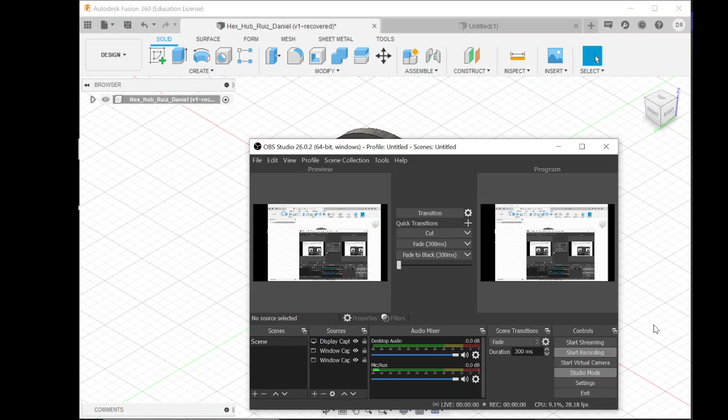Hey everyone, so today we're going to be doing the Hex Hub tutorial.

To give you a little bit of information before we start, the Hex Hub is used to mount and hold the hex shaft. The hex shaft can be used as an axle for wheels, but last year we used that hex shaft as an axle for the collector.

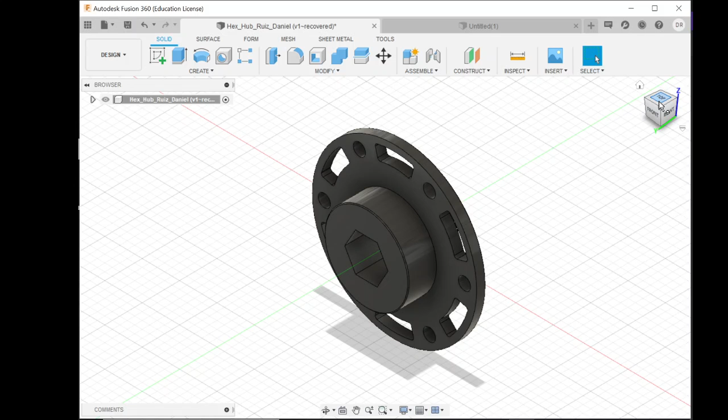So let's go to the front view so we can talk about some of the features. We have 6 holes that surround the design, and you also have 6 rectangularly curved spacings, and you also have a distinct hexagonal shape in the middle.

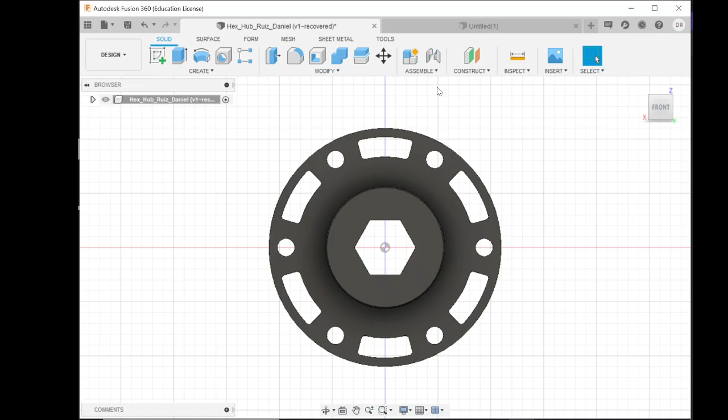So now that you're a little bit familiar with this, let's begin. You want to first begin by creating a sketch. It doesn't matter which plane, but I prefer the ZX plane. So right here, want to create a line.

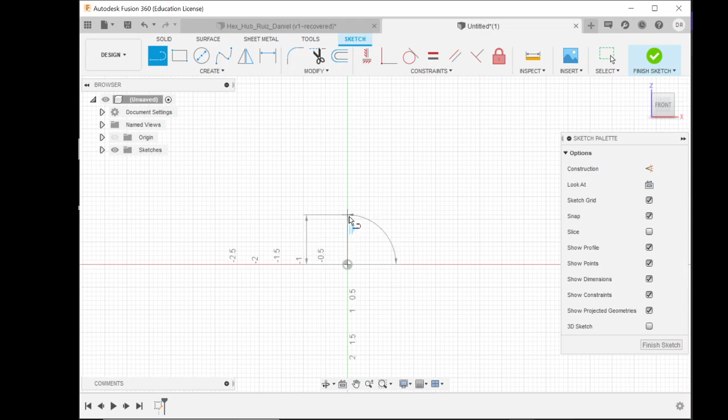You start from the origin, and on a 90-degree angle, you want the measure to be 1.1 inches. Once you have that, right click, and on the top, you want a measurement of 0.5 inches.

Going to the right, then going down, you want a measurement of 0.563 inches. Going to the left, you want a measurement of 0.375 inches.

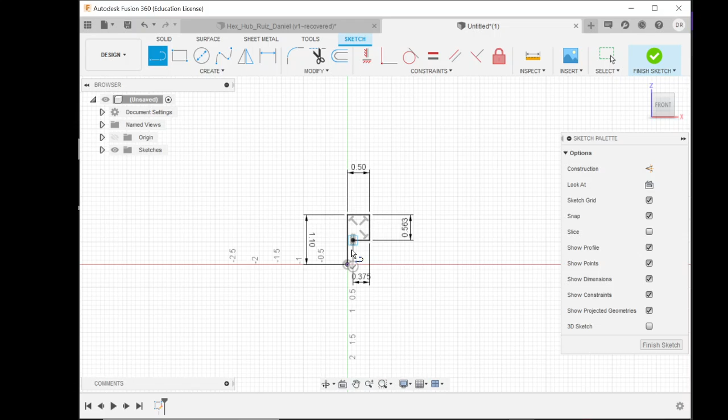Inches. Right click. Let me zoom in so everyone can see. And on the baseline, make sure that measurement is 0.537 inches. And then going to the left is 0.125 inches.

Once you have that, you can finish your sketch. And then in between the extrude and hole tool, there should be a revolve tool. You want to click there. Your profile is already pre-selected, so you don't have to worry about that.

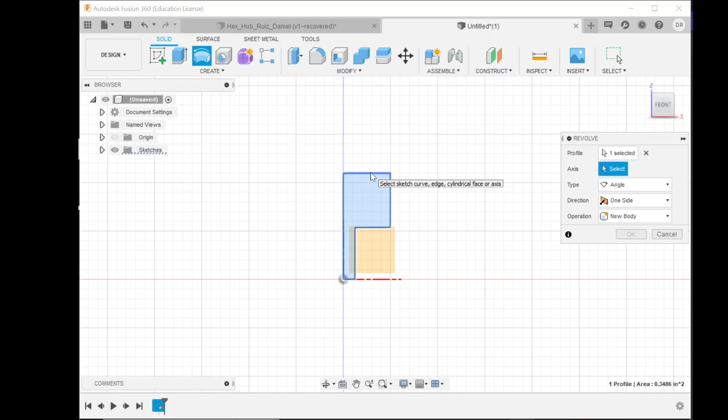All you have to do is click the axis. The axis we want this profile to revolve around is the bottom line of the profile. Click that, click OK. So now you have the overall shape of the hex hub.

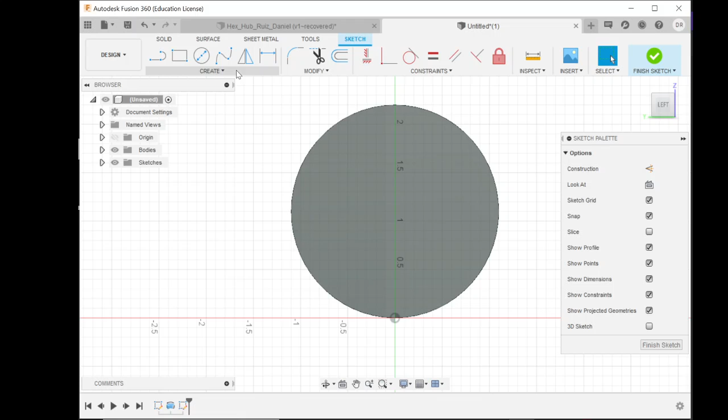Okay, so now let's create a new sketch on the back. Okay, so let's move this. Want to go to the create drop-down menu and click Polygon. It should be circumscribe polygon.

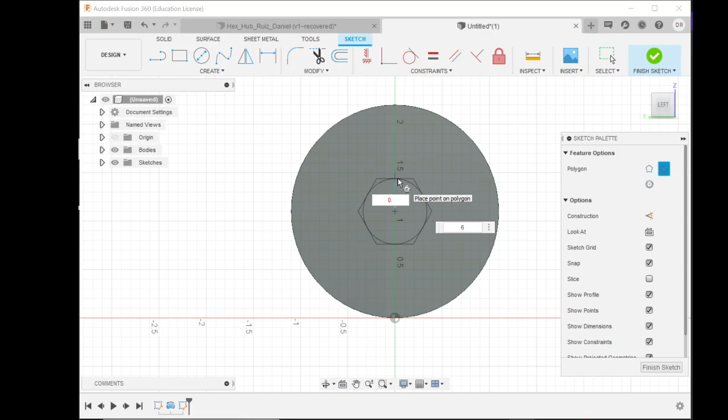And now that you picked that, you want to look for the light blue circle that indicates the middle of this design. So once you do that, you want to guide yourself up. Okay, so once you've guided yourself up, you want this hexagon to measure 0.25 inches.

You have that. Then dimension this because this is not fully locked. So go on this bottom line and then go to the origin. This will fully lock it in, indicated by the extremely dark black.

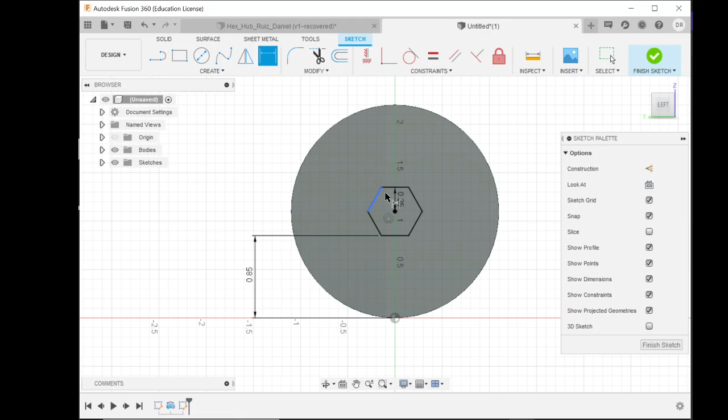Okay, and now that you have that, you want to finish sketch, and we're going to extrude this hexagon. Alright, so let's take a look. It should be an extrusion of minus 0.5 inches, or it's more of a cut than an extrusion.

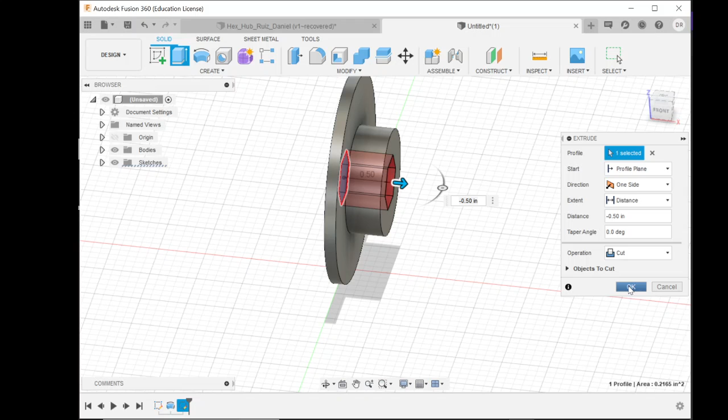Press OK, and we're going to go to back again. So now that we're done, I want to create a new sketch on the back, and then we'll click the center diameter circle right here.

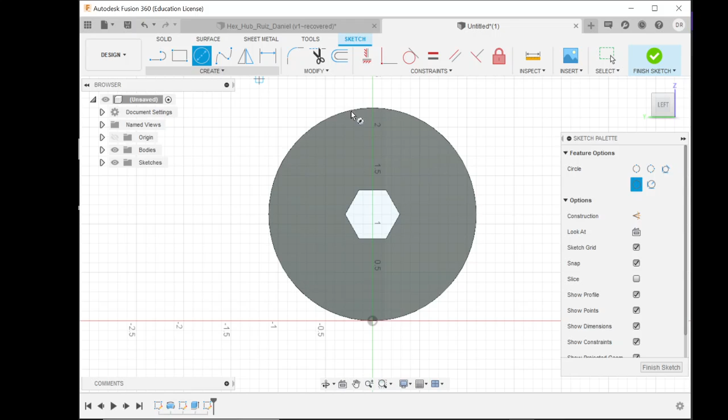And then we'll go to construction. Okay, look for the light blue circle, and then we want this circle to have a diameter of 1.875 inches.

And then press S to look for a point. This point will be used, extremely important later. And then using the dimensioning tool, we will dimension here from the center point to here.

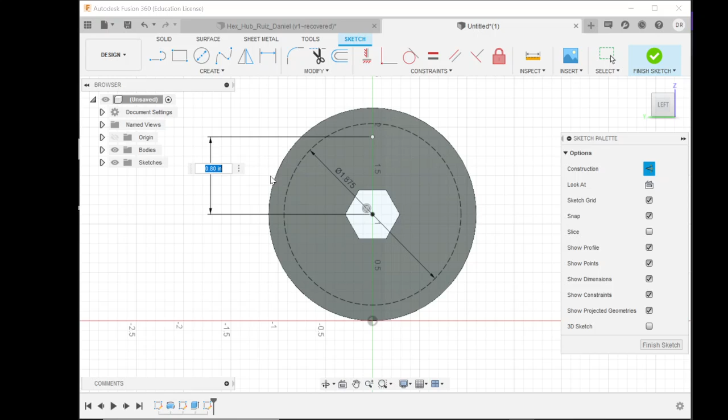We want this to be 1.875 inches divided by 2. This is the radius, so you can see that it will perfectly align with that circle. So once you've done that, as a shortcut, press H, and then click this point.

This point, or this hole, should have a diameter of 0.164 inches. It doesn't matter. This doesn't really matter. I guess I could have 0.2.

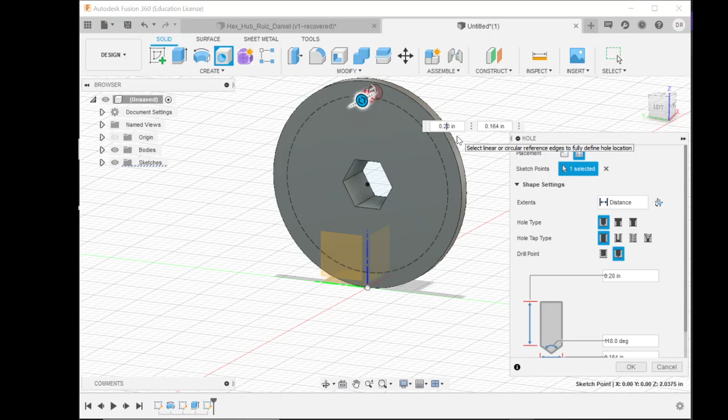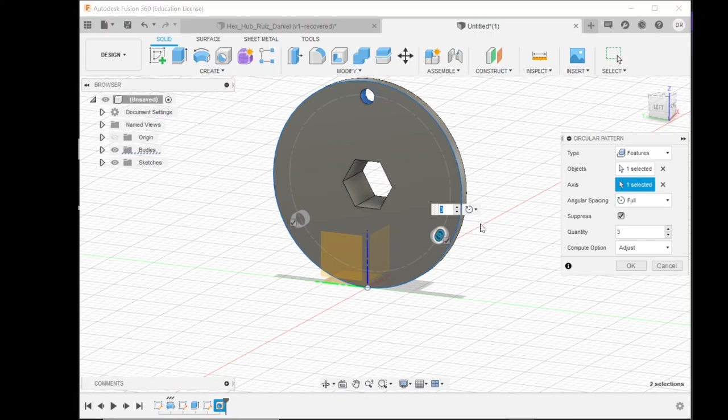Okay, so now once you have that hole, we're gonna look for a pattern. So click S and then type in circular pattern. And then click, make sure your type is feature. So once you click that, we want to select the axis. The axis is the surrounding circle. And then we want the quantity to be 6. So once we have that, now we have our hexagon and our 6 circles.

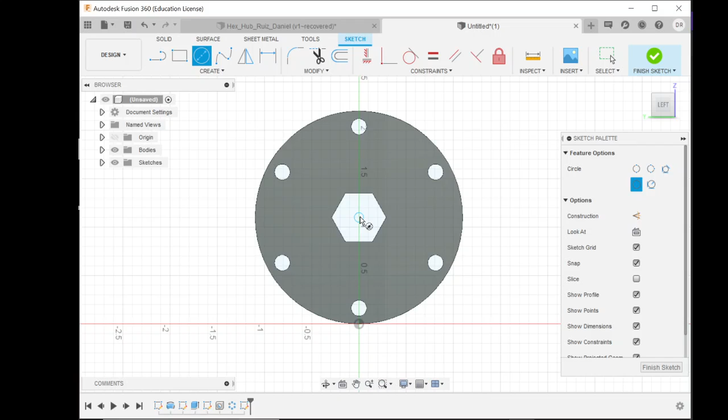So now we're gonna have to get our curved rectangles. So create a new sketch. Okay, and then we're gonna use the circle tool. So you want the first circle to have a diameter of 2.039 inches. Then you want this second circle to have a diameter of 1.711 inches. Let me just dimension it. It's going to be over dimensioned, but it's as a reference to everyone.

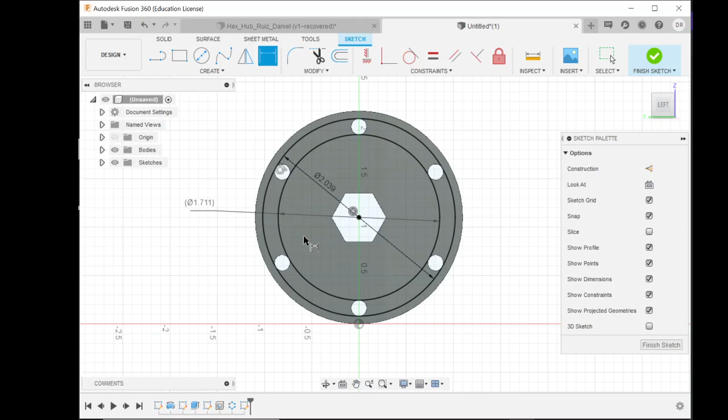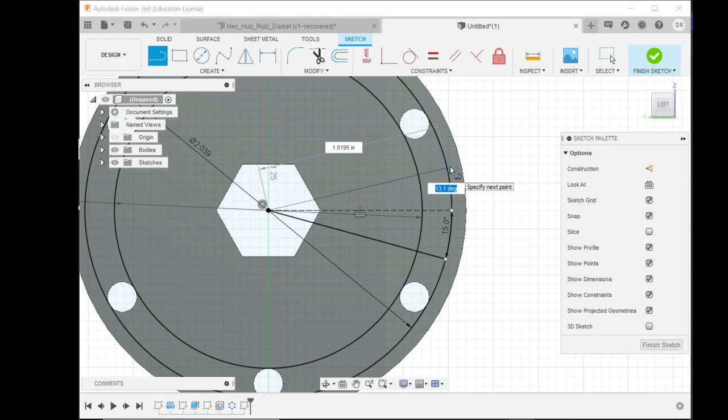Then you want this line tool, and you want to drag it out horizontally. Just make sure it says 0 degrees. Make sure you're on the circle. Okay, so we want this first measurement to be 15 degrees once you're on the circle. So once you're at 15 degrees, click enter. And then another line going diagonally. Press tab, we want this other degree to be 15. In all, this will make a 30 degree angle.

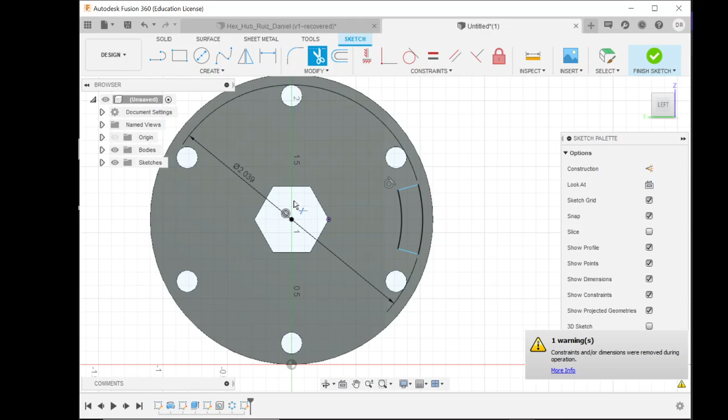Then once you do that, you want to go in between fillet and offset, and there's a trim. So all you have to do is trim everything that is not what we created. So just trim. Okay, and then you're gonna wanna delete this dimensioning because it's now useless to us. And then you are gonna want to fix everything.

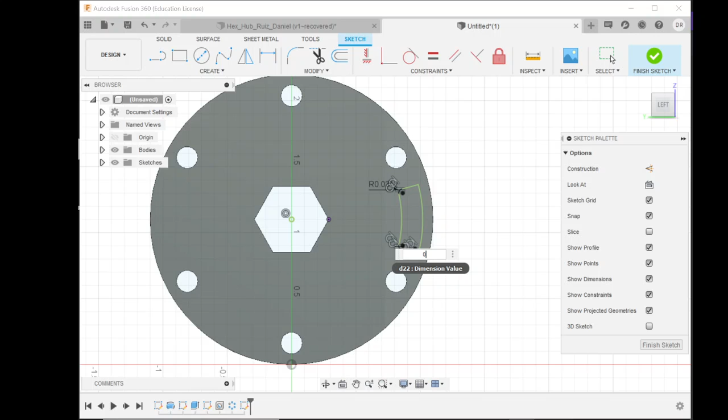Just click or highlight. Okay, once you do that, we're gonna click the fillet, and this fillet should measure 0.0312. The same one too, and just keep clicking the sides, and now you have the basic shape of this. So we're gonna extrude. Okay. Nope. We're gonna have to go back to sketch and fillet this one. Sorry about that. Alright, I'm sorry, my fault. Same thing with this one too.

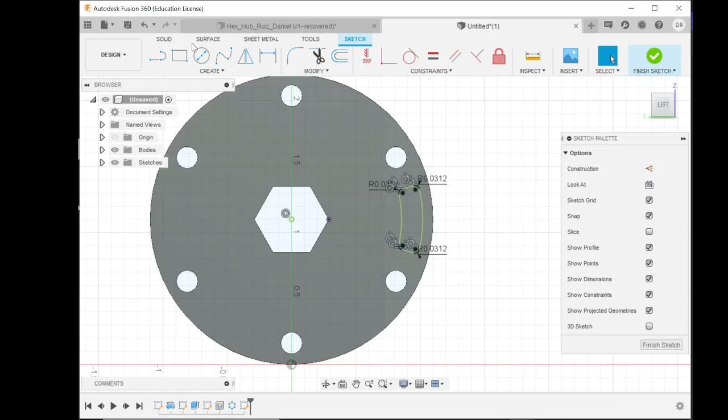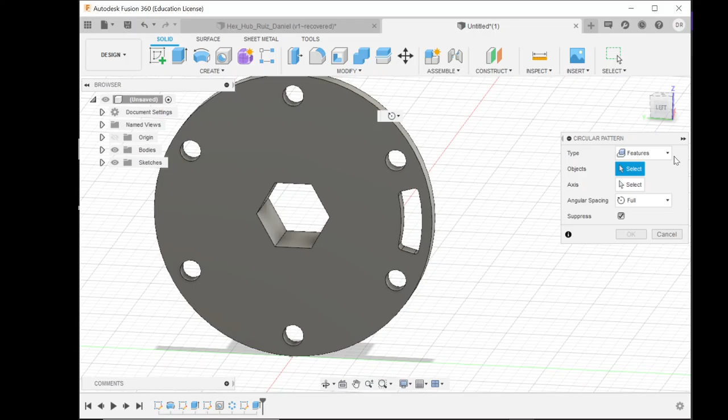So now once you're done with that, you want to go to solids and extrude all of this. Okay. So once you're done with that, we're gonna use the circular pattern. So press S and look for circular pattern. Go to feature. It should already be pre-selected. And then select your axis. It should be a quantity of 6. And then boom. Now you have your spacings and your circles and your hexagonal shape.

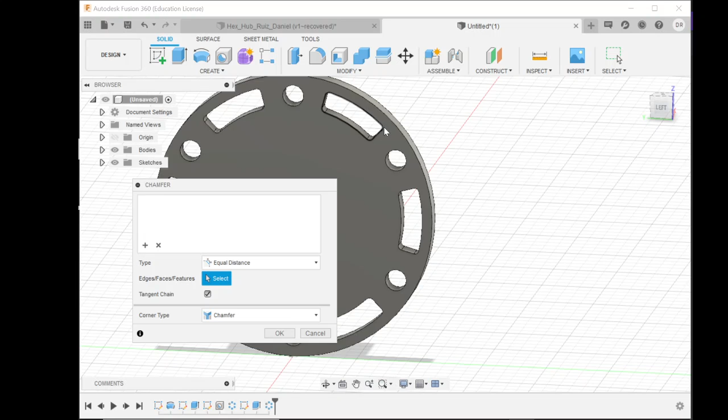For our final steps, we're going to use the chamfer tool. So we want to go to modify and then go to chamfer. You want to click here. You also want to click here. Both of these should have a chamfer of 0.01. And click enter. And now we're going to also modify the appearance.

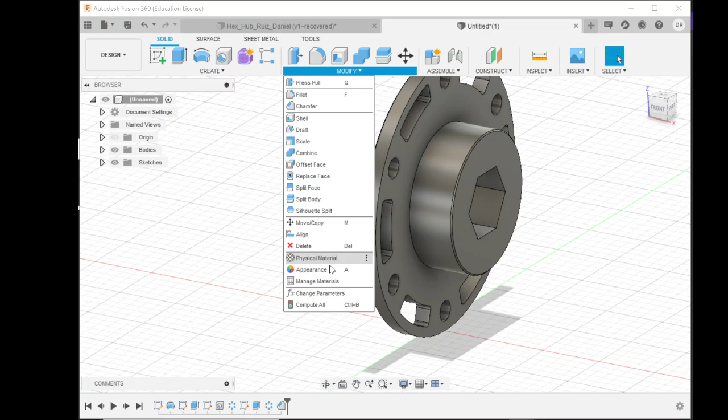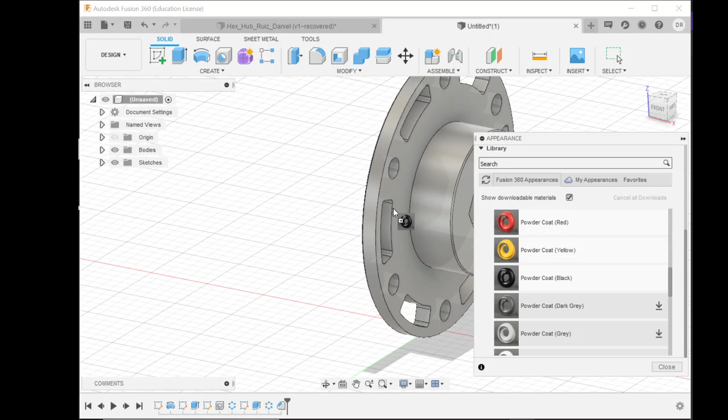It should be plastic, or actually let's look for a white or a black color. So let's go to paint and let's go to glossy. And actually it's more matte than glossy. Powder coat. Let's download this black one. Let's wait for it to download. And drag it out. Now we have our Hex Hub.